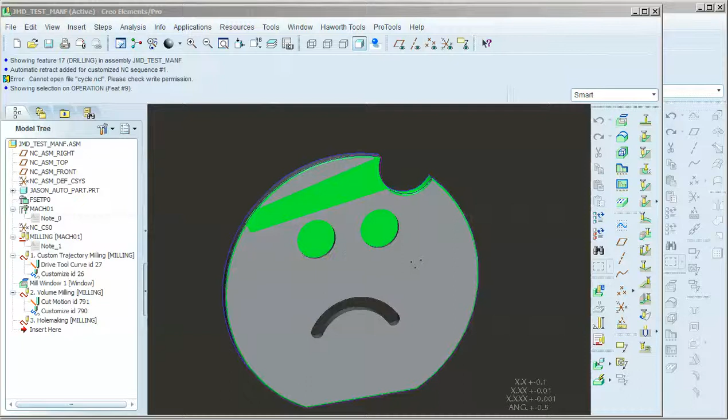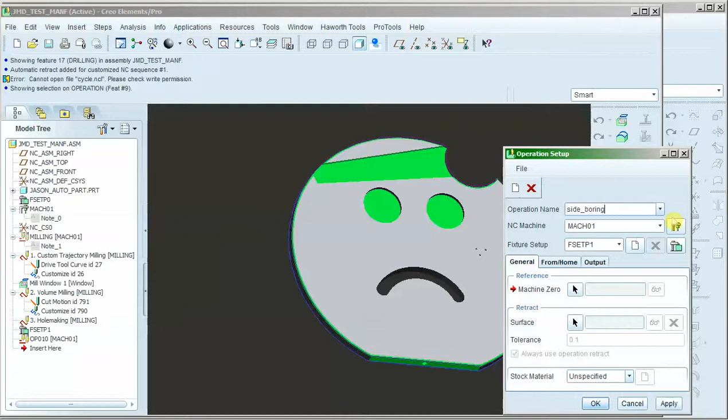Now that we've done all the machining to the front, let's set up an operation to do this edge milling, or the side boring. To do that, we need a completely new setup, so a completely new operation. New steps, operation, hit the new button. We'll name this side boring. We're going to keep it on machine 1. It might need a different machine, but this will work for us.

Now for our zero, we need something a little bit different. The problem is that we really want to have Z going in the correct direction. So to do that, I'm going to create a new coordinate system.

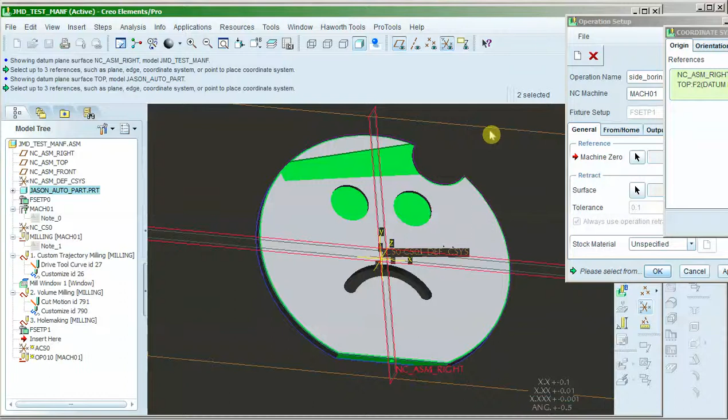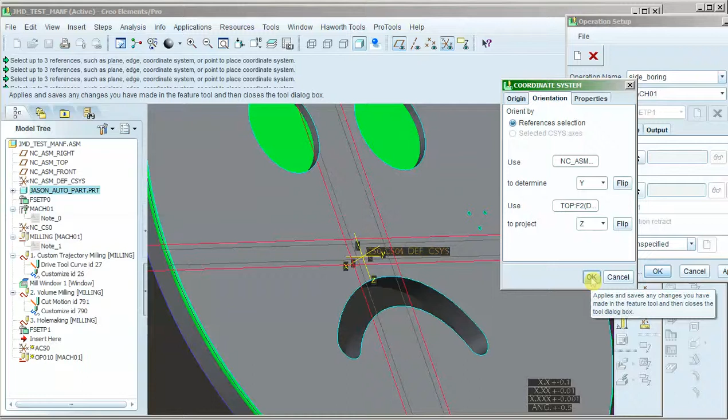Personally, I like to do it by planes, so I'll pick my 3 planes. There we go. Now I need to get the orientation of the Z correct. What's on the Y we want to use to determine the Z, and I flip it the right direction. If this doesn't seem intuitive at first, just click the buttons a whole lot of times. If you click enough times, you'll get the right answer. There we go, we got Z going in the right direction. That'll be our coordinate system. I'll make sure I pick the right one.

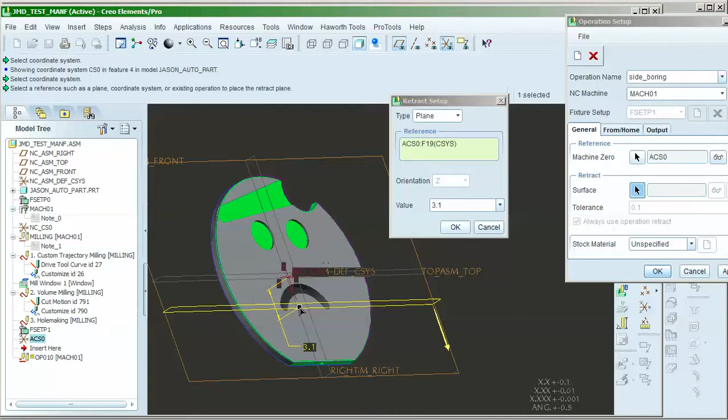Oh, I picked the wrong one. There we go, the new one. Very good. Now we'll do our retract plane. Again, we're not quite sure how important this is, considering we're going to post-process, but as a matter of course, we'll make sure there's some clearance for the tool. There we go. Hit OK, now we have our operation.

It's time to add a new step. This step is really easy because we're just doing drilling, so we'll go standard drilling. Got to be careful here. There's a half inch end mill, a 120 basic drill.

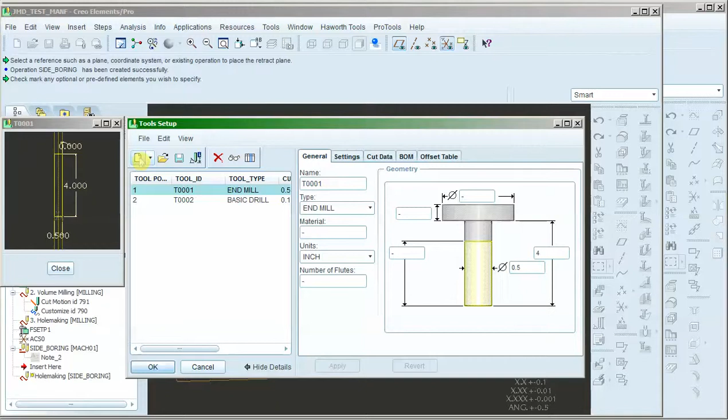Let's make a new drill. I'm going to get one like that so I get the same shape. Change the diameter, 120. Oh, wrong size. You want to make it that size? There you go. All right, thanks, Ken.

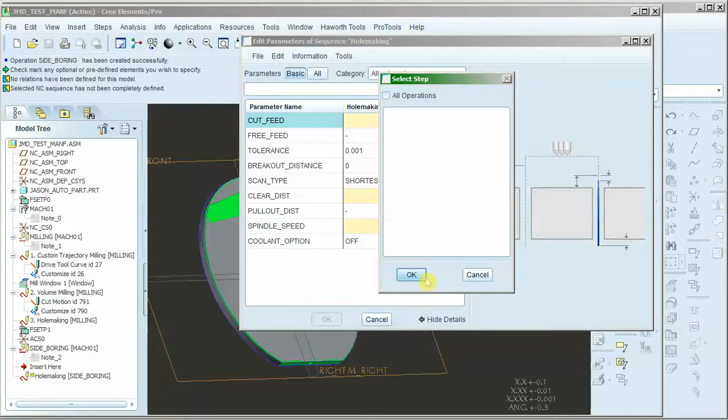All right, let's copy these settings. Doesn't let you do it. Okay, let's make up some fake settings, huh? Sounds like a plan. There we go.

I've got a drilling operation. Just like we did before, it'll tell us what holes are available. Oh, that's handy, I like that. Look at that - any holes in that direction of that diameter, you've got them covered. There we go, let's play it.

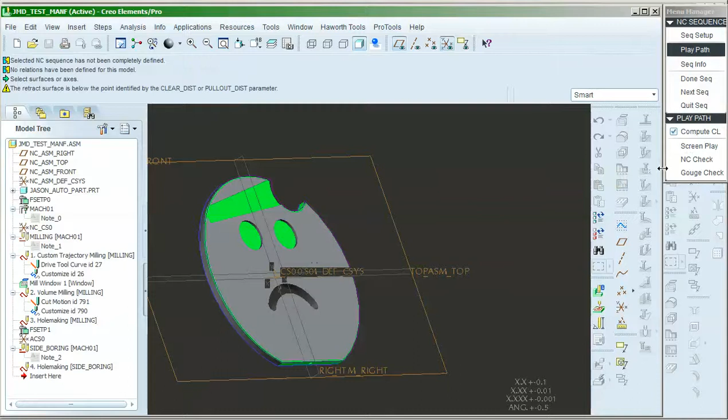Oh, that's it, that's all there is to it, friends. It's done, drilled a hole in the bottom. Good, got it. Don't forget to hit done. There you go.

Now we haven't done the machining on the back. We'll show you how to do that, but it's really a lot like the machining on the front. The key thing is that you're going to have to set up a mill volume, have your coordinate system go in the right direction, and make a new step for rough volume, and you should be all set. That's about it for that part.

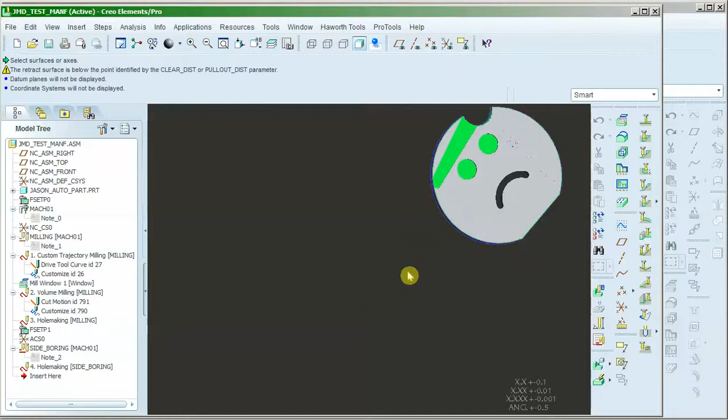But Kevin's proud of me here because he doesn't believe this is going to work. He says, what's the point of doing all this? Yeah, Kevin, that's right. You said this was going to be robust. What did you mean by that? So what does it mean by robust? It means that we can change the shape and we're still going to get something that works.

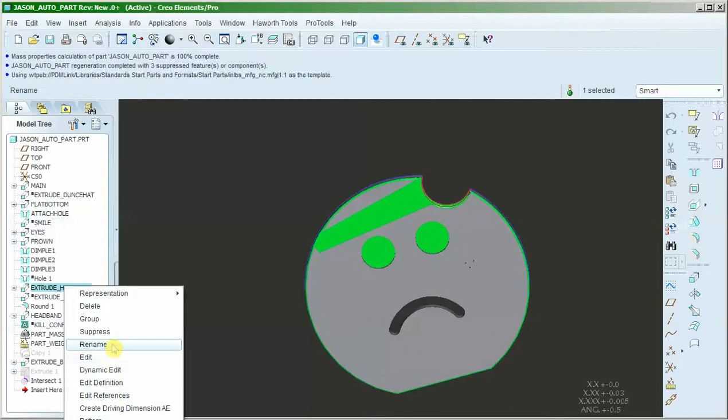So let's give it a try. I'm going to go back to my part because somebody wanted a different option. Let's say somebody wanted to turn this feature back on - we'll turn this feature off, we'll turn the other one back on. We'll do that, and we'll resume this one. Then we're going to go with the dunce hat. Okay, so let's resume that. Good. And somebody wanted an extra hole in there, so let's turn that back on. All right, and then let's change the guy's attitude.

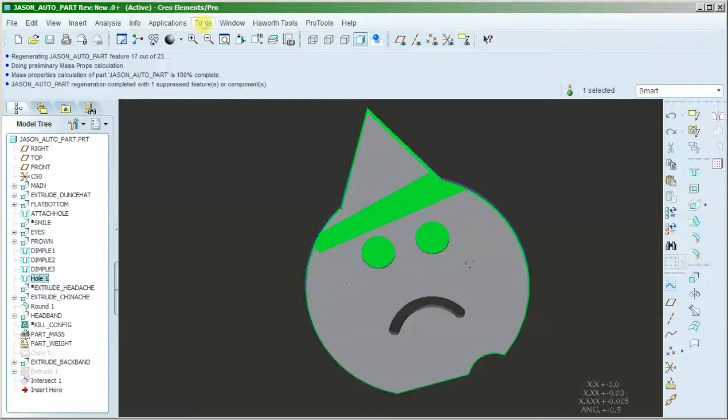Since we used a little pro program, we can change the attitude too. Regenerate. Okay, so we have quite a different shape, but we should get the same result. So let's give it a try.

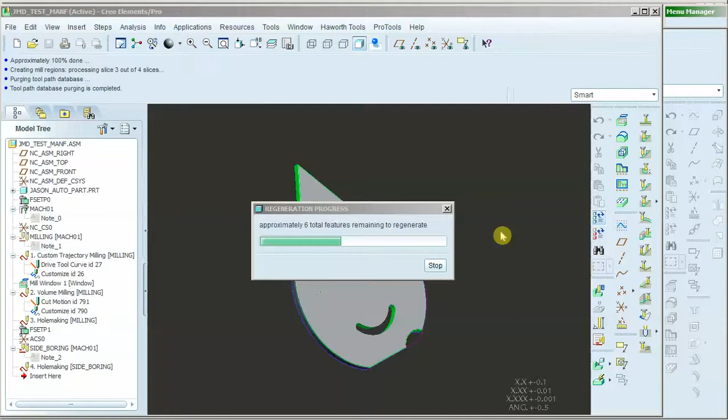All right, you've got an old path here. I'm going to make sure we regenerate here too, because it's a little different when it regenerates the toolpath. Make sure you click Compute CL. Alright, let's run it. We'll go back to this machining step. Play the path.

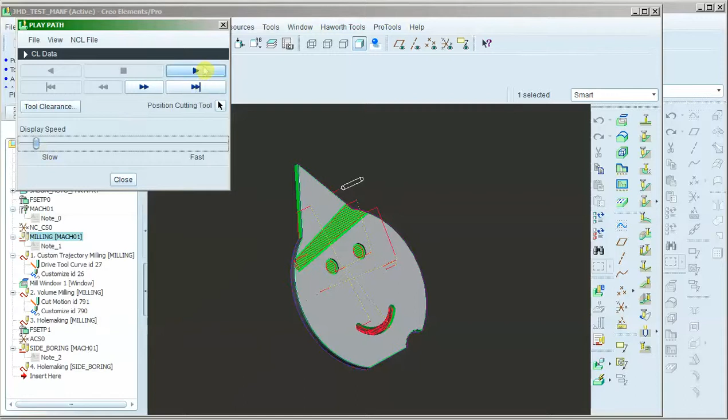Oh, something's wrong, Kevin. Yeah, it doesn't look like it completed that outside profile. We didn't get all the way around the dunce hat here. Let me show you that again, folks, see if I can pause at the right spot. Oh, right there, it jumped off. We lost our path.

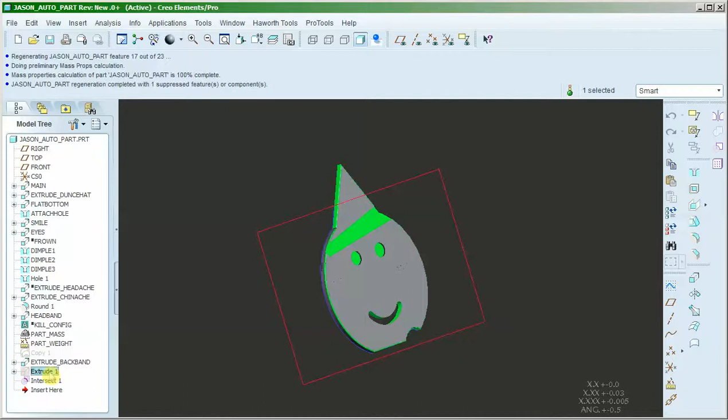Alright, taking a closer look here, you see I've got this blue line. Kevin, any ideas what's going wrong? Yeah, I think I have an idea. If you go back into your part, I think it's that surface you created earlier. You mean the one I made that was super robust? Yeah, the one that was supposed to be parametric, but you didn't make it parametric. Oh yeah, that's right. Okay, so you probably should make this parametric in one way or another so it at least covers your part. You can see here it doesn't cover the whole part, so the intersection is incomplete.

Let's make this a little bit better. So again, instead of making it parametric - well, no, we're still not going to do that, we're just going to cheat again. And there we go. So let's redefine and regenerate. Take a closer look, we'll see if we get that little curve. Yeah, there we go, she goes all the way around. So we should be a lot better off. Let's give it a try now.

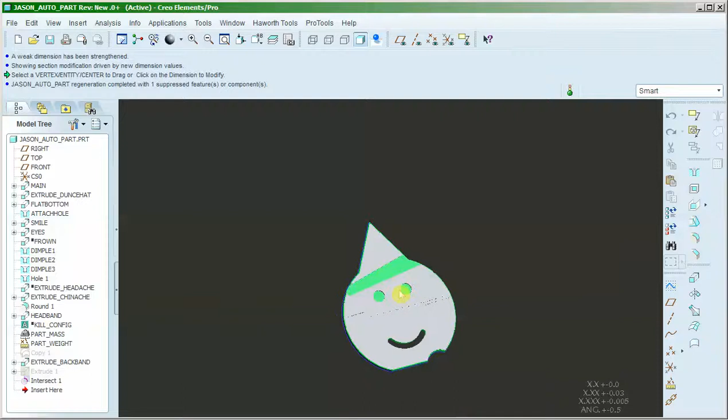I learned my lesson here, so I'm going to make sure we regenerate on this side too. Oops, I hit the wrong button. Don't hit the wrong button, that'll help. There we go, and let's machine it.

Hey Kevin, what do we do about all those radii around the edge of the part? Those radii will be taken care of by the tool selection. Ah, okay, so we're not going to try to machine the radius - we're just going to run around it with the tool, and the tool will have that in it. Correct, that's a good idea. Okay.

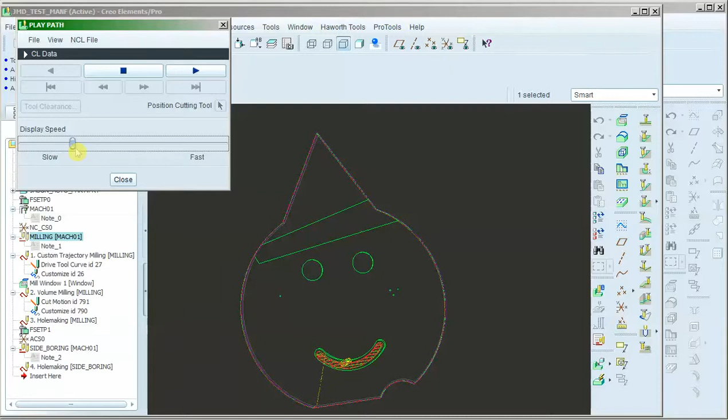Speed this up a little bit, folks. Here we go, look, we went all the way around. The machine made some dust out of the mouth. That's good. Do the eyes - yep, good. Headband's good.

Change his tool, drill some holes. Got the holes drilled in there. We're set. Now you didn't see the end mill operation because you have to run each of those separately, so I'm going to go down to this operation and run this. You can see its path through, but as you recall, it's pretty quick. There you go. Thanks, everybody.